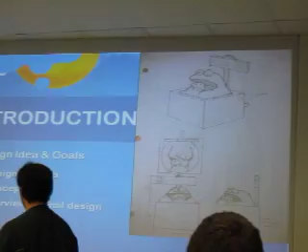And then, so the final design is, ta-da! Okay, that's what we thought we were going with to begin with, but of course we got something much cuter.

Yeah, so our next presenter is up. So I'm going to talk about our design sketches.

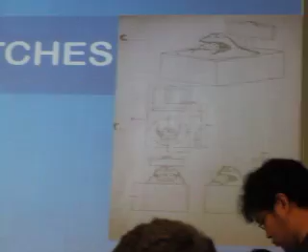So we start off with our initial sketch. And the image on the right is our multi-view as well as isometric view. And this is our cross-section view.

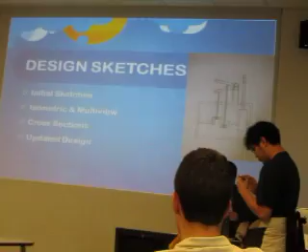And the image on the right is our... so however, the original design needed a metal gear of a smaller size, which was beyond our budget to acquire. So as a result, we decided to redesign.

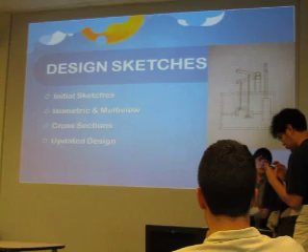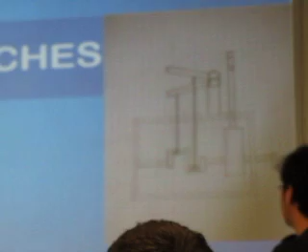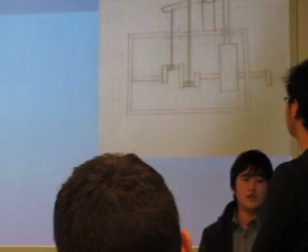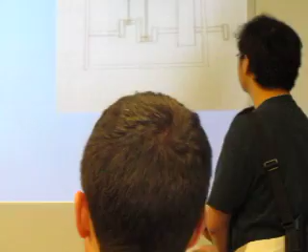So when we turn the crank, it moves the two long hooks up and down. That moves the puppet's mouth. Also, the signpost moves up and down as well when the crank is turned. So the image on the right is our final design of our mechanics.

And overall, the design sketches were very useful when creating ideas, and were very helpful in modeling SolidWorks. And Victoria now is going to talk about our SolidWorks modeling stage.

So hi, I'm Victoria, and I'm going to talk about the SolidWorks model, and also briefly touch on the design process so you can see how the design evolved throughout this project. As Joy mentioned, we changed our designs quite a few times during the project.

Anyway, so when we go back to our goals, this is what we wanted. We wanted a very simple design to do what we want the Cookie Monster to do. At the same time, we're going to use less materials if it were simpler.

So to make sure that our new design works, we built a prototype first, just to check if it's really going to move the pin up and down. And then we worked, and when we saw that it worked, we continued working with our SolidWorks model.

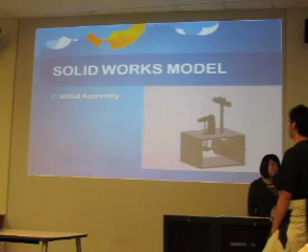So our first SolidWorks model is here, the initial assembly. Sadly, the initial assembly, as awesome as it looks, which is not really awesome, did not work.

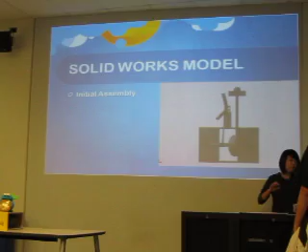Some parts we built wrong. We used fillets instead of pins, so it had too many faces. The mouth would go this way when you turn the crank, we couldn't turn the crank.

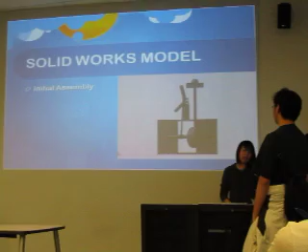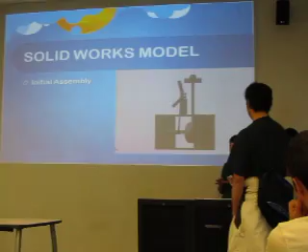So, yeah. So what we did, while that was on hold, we continued building our physical model, and when we got really stuck with our SolidWorks model, we asked our instructor Sal to check, just to show how we're gonna build our model and make it work.

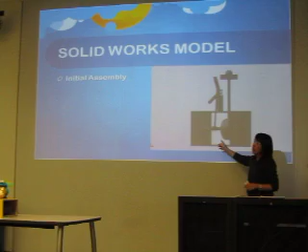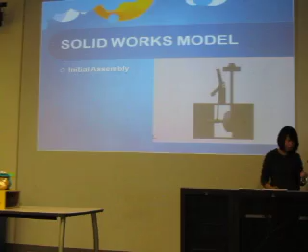He said maybe we should build it the same way we built our physical model, because while building it we changed a lot of things. We made the design much simpler. Notice the crank here had a few parts, but when building the physical model we decided to just make it with one wire, and we made other parts even simpler. So we decided to make the SolidWorks model exactly the way we made the physical model, and finally it worked.

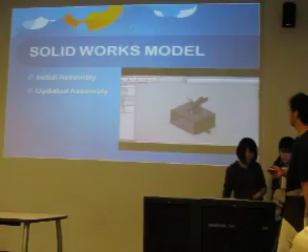I'm going to show you the video of the SolidWorks model working. So now it turns, yay. There you go.

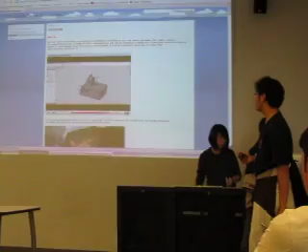Okay, that's pretty much it. Stop that. Anyway, so some insights on SolidWorks.

There are some pros and cons to using SolidWorks for us. Pros: it gives you a very comprehensive view of your model even before construction. It's good to see, and it provides enough information to work on and spot improvement points and problem points even before you make the model.

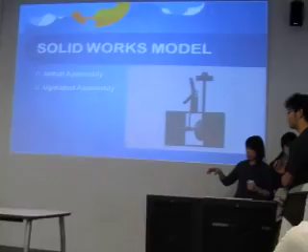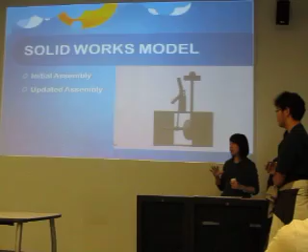Some cons for us are that it couldn't model some of the parts we have. If you see the mouth inside the Cookie Monster, there are strings and elastic we couldn't replicate, and we had a difficult time making Cookie Monster because he's made out of wood. Also, some dimensions are not the same - here the holes in the shaft would have the same dimensions, but in the physical model it's not the case, so we had to remodel everything and so on.

So Billy will demo the model for us. Okay, so, the physical model.

For our materials, while we were building it we went through the prototype phase and thought, let's use cardboard - it's quick, disposable, easy to use, easy to get rid of. So we built it out of cardboard and thought, this is good enough. Cardboard holds. We made it out of cardboard, except we didn't just have one layer, we had three layers.

Next we had testing. We tested some materials before we made the design changes - we were going with the gear and some gear mechanisms.

This is our testing phase - we were testing what would work and what wouldn't for the gear. We found out that a towel on sandpaper works really nicely for the gear, which of course then led us to make some design changes, and we totally lost that part.

After we were done with everything, we got this, which is our Cookie Monster with the cookie. Nom nom nom nom nom.